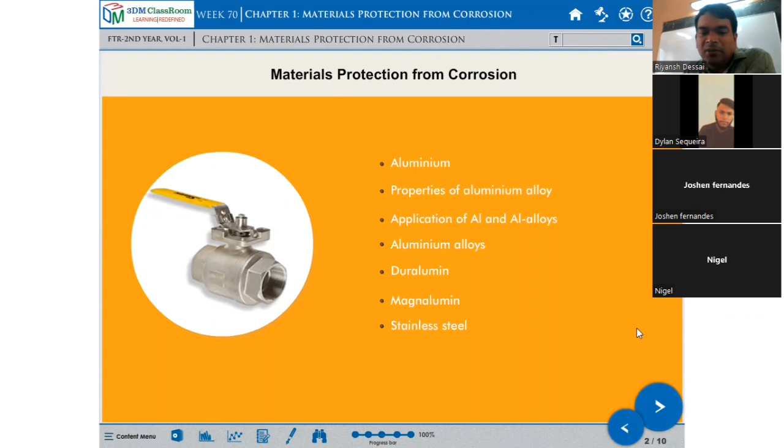Now, aluminum is a product mostly used for metal surface coating purposes. Aluminum powder, zinc powder, stainless steel powder - we can coat it. Aluminum is one of the most abundant elements in the earth's crust and also the most important of the non-ferrous metals. Aluminum is silvery white in color.

It is a light metal with a density of one-third of steel. So the density of this metal is very less compared to mild steel and others. It is one-third.

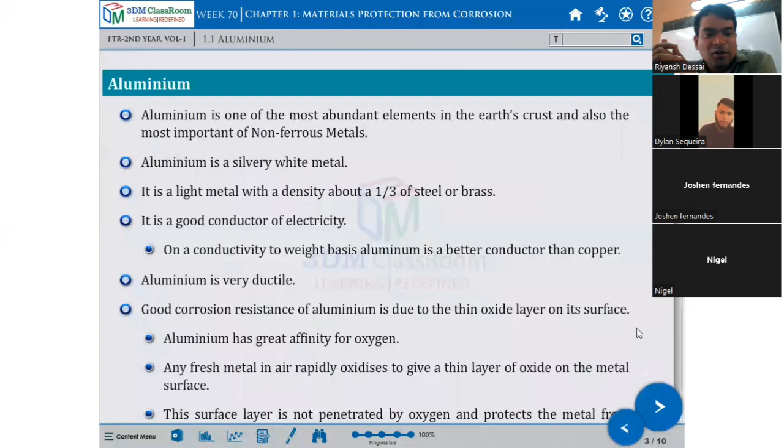It is a good conductor of electricity, that we know. On conductivity to weight basis, aluminum is a better conductor than copper. Aluminum is very ductile - even copper is also ductile, that's why we can draw it into wire. So on conductivity to weight basis, aluminum is better conductor than copper.

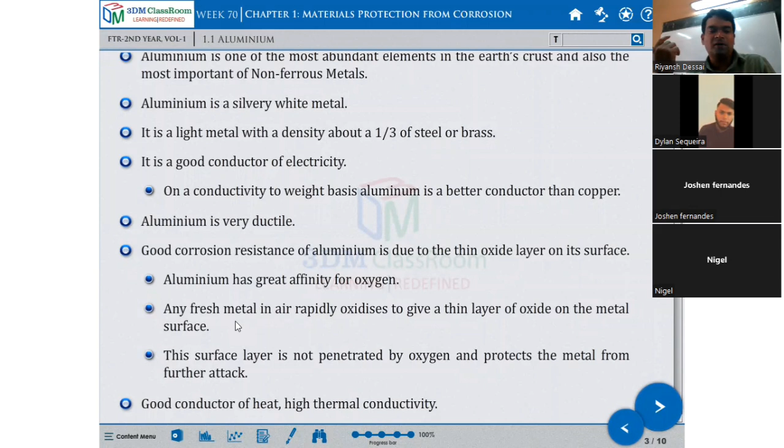Aluminum is very ductile. The good corrosion resistance of aluminum is due to the thin oxide layer on its surface. Aluminum has great affinity for oxygen. Any fresh metal in the air rapidly oxidizes to give a thin layer of oxide on the metal. If fresh metal gets contact with open air, there are chances of oxidizing - another layer will form, like a powder coating. So this surface layer is not penetrated by oxygen and protects the metal from further attack. This layer acts like a shield and protects from further attack.

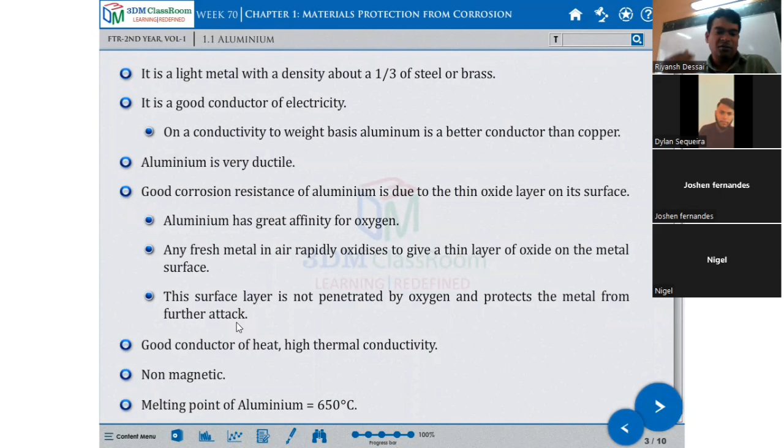Good conductor of heat, high thermal conductivity, non-magnetic, and melting point of aluminum is 650 degrees centigrade. This everybody has to remember. Aluminum is a light metal with good conductivity - it gets melted at 650 degrees centigrade. It has high thermal conductivity, and one more property is that it is non-magnetic.

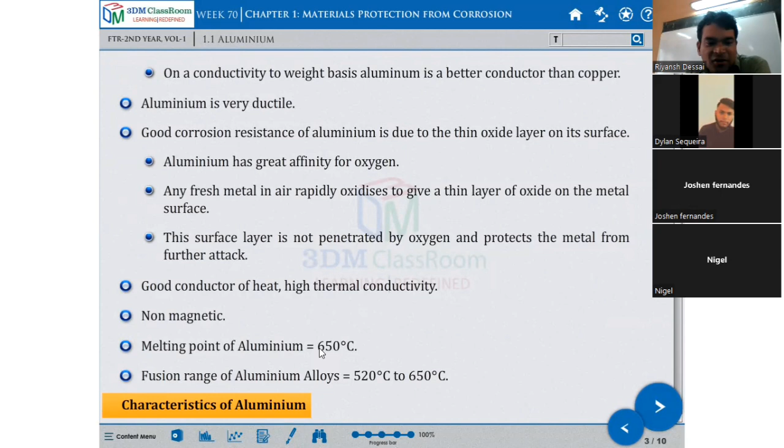When you are checking aluminum, you should check with a magnet. Suppose aluminum gets attracted to the magnet, then it's a mixture of iron, a mixture. If it does not get attracted, that means it's pure aluminum. You can check it that way - non-magnetic and melting point 650 degrees. The fusion range of aluminum alloy is 520 degrees centigrade to 650 degrees centigrade.

Characteristics of good aluminum: light in weight, one-third of the weight of steel, high thermal and electric conductivity, non-toxicity. This is also important - because of this non-toxicity, we can use it for utensils in the kitchen. We can eat off aluminum things. We can also cook in aluminum metal. Then, soft and ductile, low specific gravity, high strength to weight ratio, high reflectivity, and they exhibit toughness and high strength.

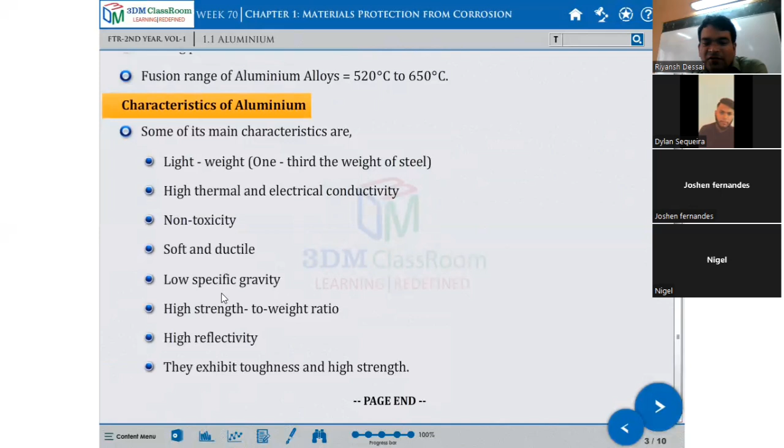Now these are all the properties of aluminum. Now, there are properties of aluminum alloy. Aluminum alloy is a mixture of aluminum with some other metal, maybe magnesium or any other. So aluminum forms high strength alloys in conjunction with other metals such as copper, chromium, nickel, iron, zinc, manganese, silicon - these are the elements we can use to mix with aluminum and form the alloy. Aluminum mixed with copper gives another alloy, chromium mix gives some other property, and you can mix with nickel, iron, zinc, manganese, silicon.

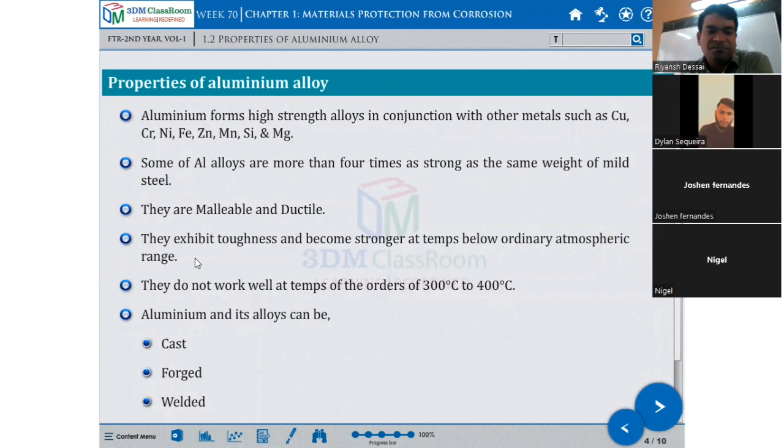Some aluminum alloys are more than four times stronger than the same weight of mild steel. As mixed with other metals, it becomes four times stronger than the same weight of mild. They are malleable and ductile. They exhibit toughness, become stronger at temperatures below ordinary atmospheric range, but they do not work well at temperatures of the order of 300 to 400 degrees.

Aluminum and its alloy can be cast, forged, welded, extruded, and rolled, etc. Cast means you can melt the aluminum and put it into a form, and inside casting you get a desired shape and size - this is aluminum casting. Forge means you can change the shape and size by heating - you heat it. Then welded - aluminum can be welded.

Aluminum welding is very costly, and you will not find skilled labor easily. It requires very high skill, but if you know how to weld aluminum, you will get success. There is a lot of demand for this aluminum welding. Then extruded, rolled, etc.

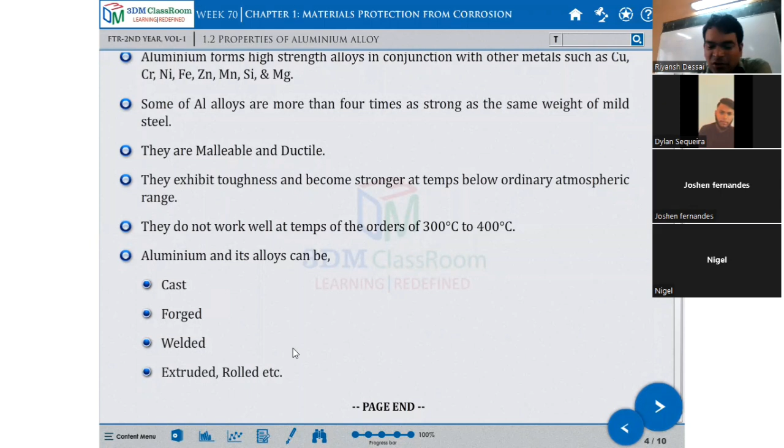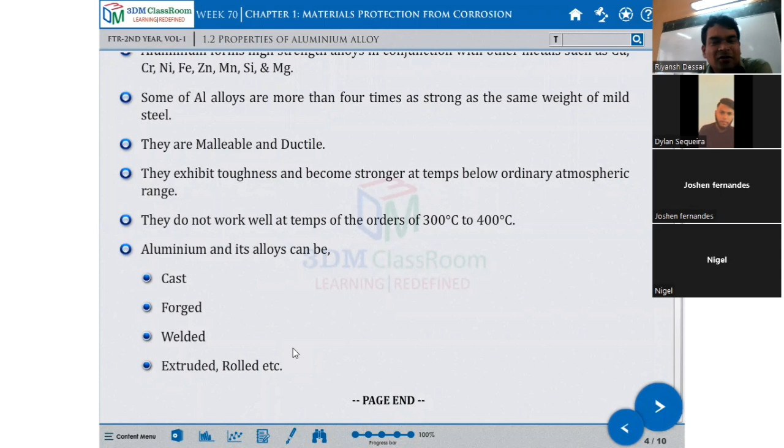Someone can start their business also - you can learn how to weld aluminum and put up a small workshop. There will be high demand for it. I don't know, maybe check some photo or I don't know. Someone who is doing this, but very rarely are people doing it.

Next, the application of aluminum and aluminum alloys: structure framework, engine parts, trim and decorative features, hardware, doors, window frames, tanks, furnishing fittings. This is already covered.

In the food industry, aluminum alloys find applications - both applications are shown in the video. Just watch this video.

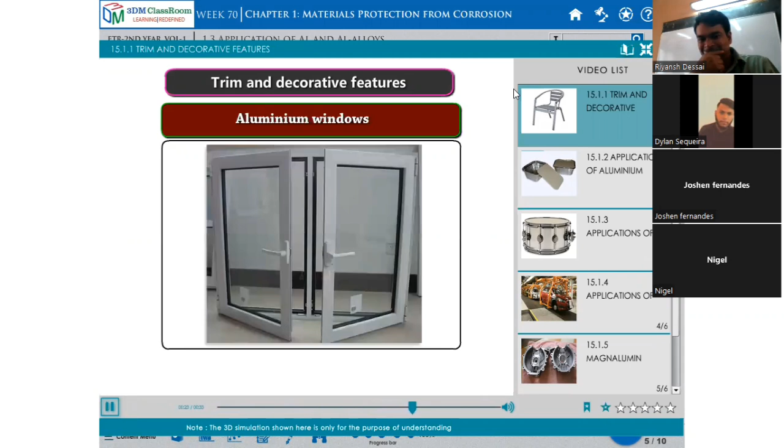Aluminum doors, aluminum fitting, aluminum tanks, aluminum chair, aluminum windows. Many component parts are made up of aluminum alloys. These are the uses of aluminum alloys.

In the food industry too, aluminum has uses. You can see applications of aluminum alloys. In this video, we will discuss the application of aluminum alloys. Shipping containers are also made of aluminum alloys.

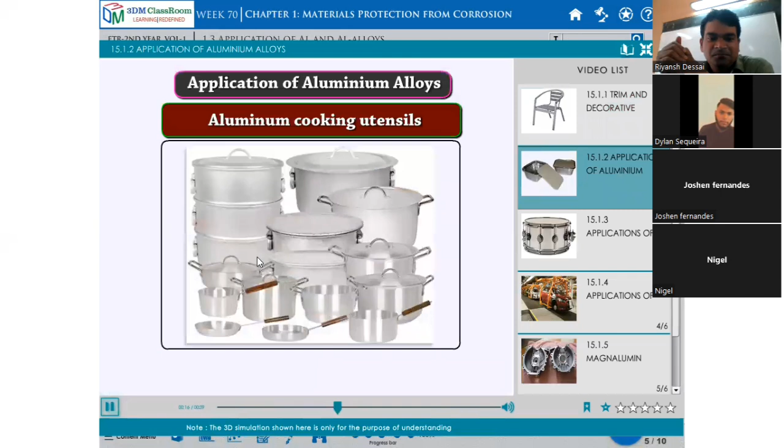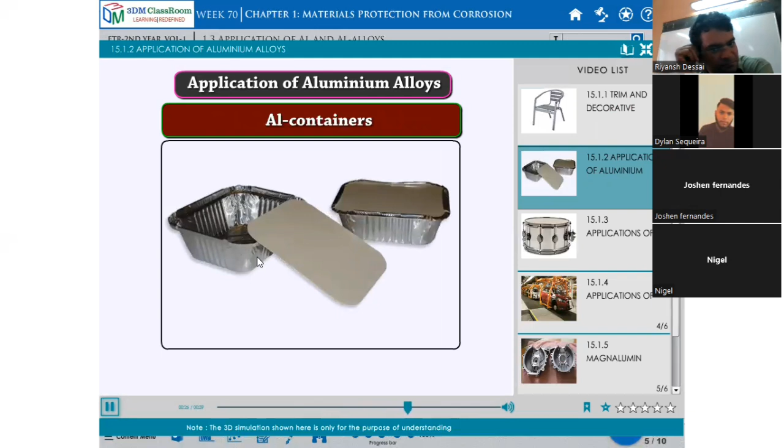Aluminum cooking utensils, aluminum containers, and other containers are also made of aluminum. Aluminum foil and other alloy parts are also used in the food industry. So it is applicable in the food industry.

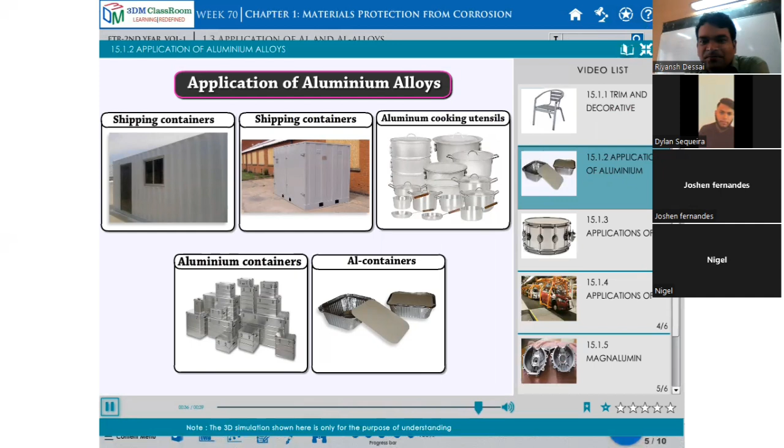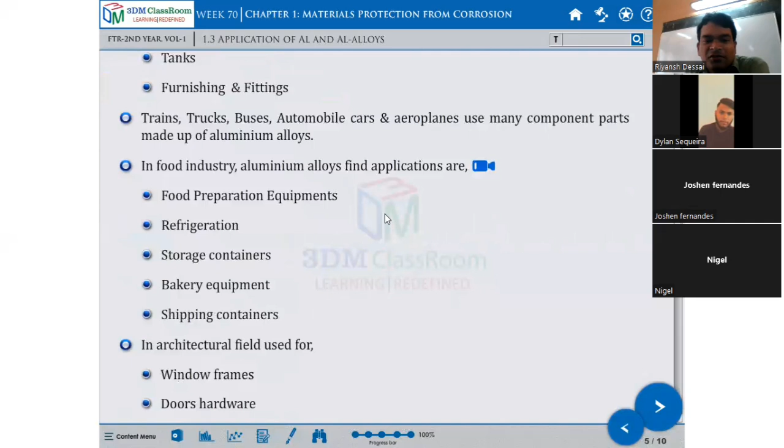Trains, trucks, buses, automobiles, cars, and aeroplanes use many component parts made of aluminum alloy. In the food industry, aluminum alloys find application in food preparation equipment, refrigeration, storage containers, and shipping containers.

In the architecture field, aluminum is used for window frames, doors, hardware, roofings, railing, fasteners, lighting fixtures, solar shading, and grills, etc.

In the process industry, it is used to handle organic chemicals, petrochemicals, and drugs. It is used to produce tanks, drums, pipes, heat exchangers, grating, smokestacks, precipitators, centrifuges, valves, fittings, etc.

So there are various products we can produce using aluminum. In this video, we will discuss the applications of aluminum products.

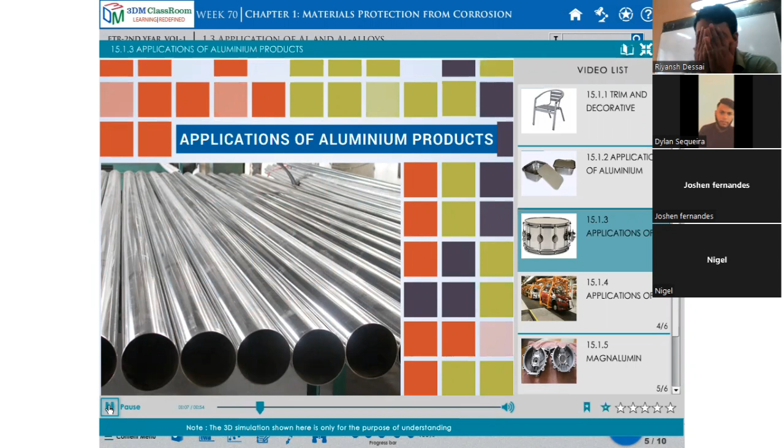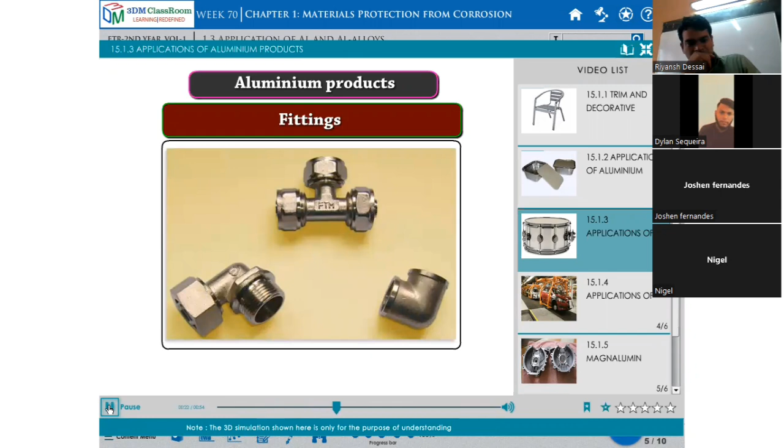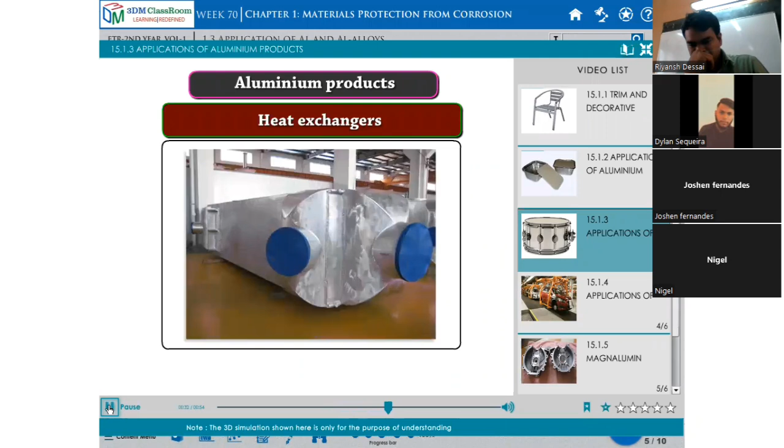Pipes, valves, drums, fittings, gratings, tanks, heat exchangers, smokestacks. These chimneys and such are made of aluminum. Aluminum products are used to produce many different products.

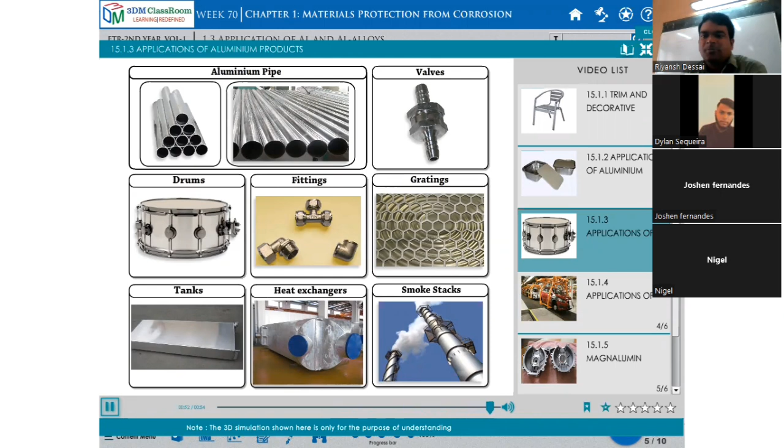Understood? What are the various uses of the aluminum industry? This alloy I will not take up now. Duralumin, I think we already discussed - duralumin is another alloy from aluminum.

It is light, tough, highly ductile, and easily castable. It is a good conductor of heat and electricity, with corrosion resistance. It approaches steel in strength, while its density is one-third that of steel. So its strength is almost equal to steel, but its density is one-third.

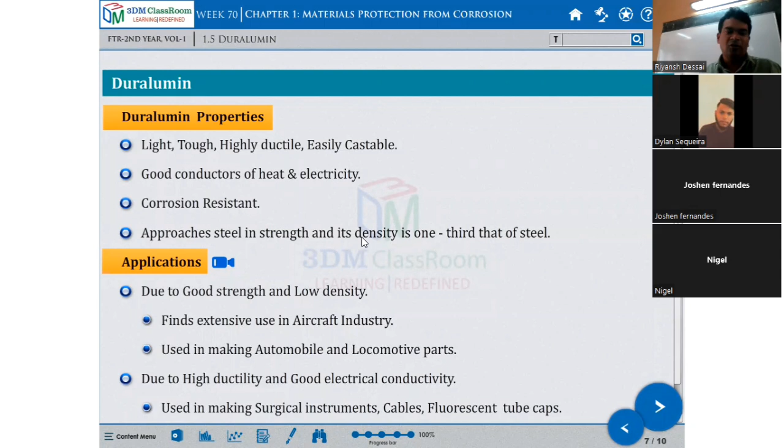Now, where is duralumin mostly used? Due to its good strength and low density, it finds extensive use in the aircraft industry - most aircraft industries use duralumin. It is also used in making automobile and locomotive parts, where the body of automobiles is made of aluminum, which is very important.

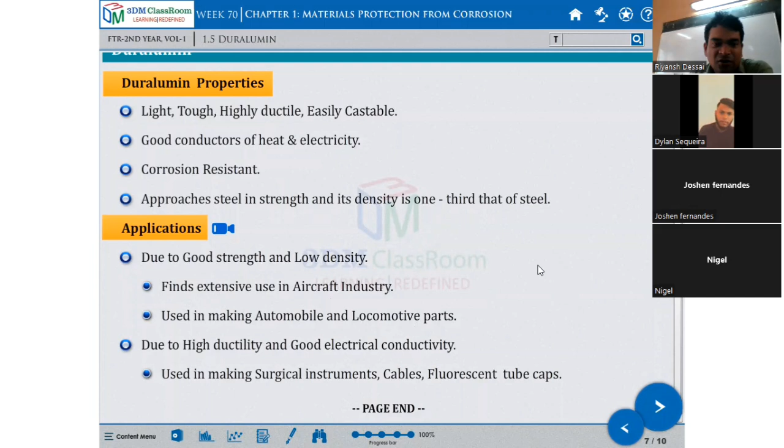Due to high ductility and good electrical conductivity, it is used in making surgical instruments, cables, fluorescent tube caps, etc. So all these - surgical instruments, cables, fluorescent tube caps - can be made using duralumin metal.

Magnalumin is another aluminum alloy. It is strong, tough, and lighter than aluminum. It possesses mechanical properties similar to brass. It is used for making cheap balances, airplane parts, and scientific instruments.

So this is used for limited purposes - making cheap balances, airplane parts, scientific instruments. Electron application is used for the crankcase of engines, cover brackets, and similar lightly stressed components, and in construction of pans, petrol and oil tanks, brake components, and gearboxes.

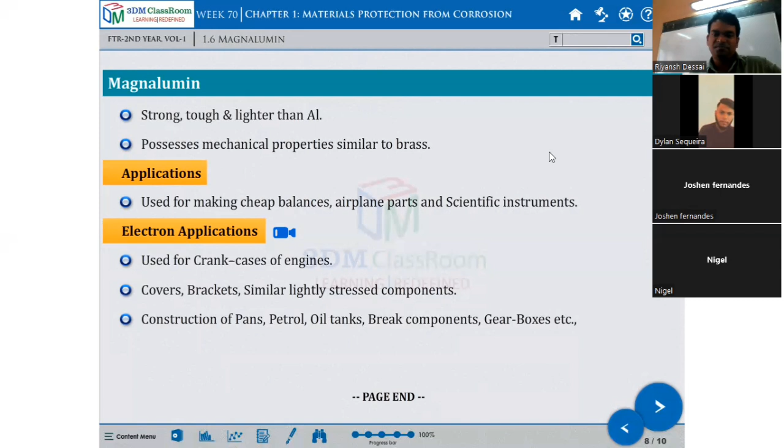Let's look at the electron application. Magnalumin electron applications - in this video we will discuss the Magnalumin electron applications: gearboxes, brake components, crankcase of engine, oil tanks. These are the products we can manufacture using Magnalumin.

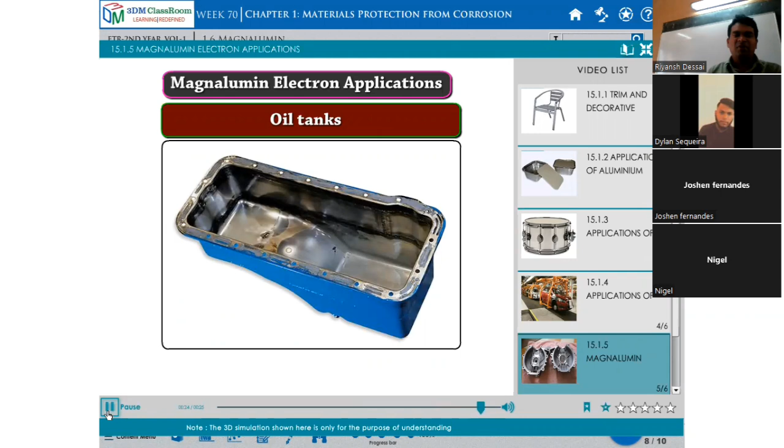Now next, what is the metal? Stainless steel - adding chromium to low carbon steel gives it abrasion and corrosion resistance. So if we mix low carbon steel with chromium, it gives abrasion and corrosion resistance.

In addition to iron, carbon, nickel, and chromium, modern stainless steel may also contain other elements such as niobium, molybdenum, and titanium. If you mix all these - iron, carbon, nickel, chromium - modern stainless steel may also contain elements such as niobium, molybdenum, and titanium.

Nickel, molybdenum, niobium, and chromium enhance the corrosion resistance of stainless steel. The addition of a minimum of 12% chromium to the steel makes it resist rust, making it more stainless than other types of steel.

Chromium, as a steel component, combines with oxygen in the atmosphere to form a thin, invisible layer of chrome-containing oxide called a passive film.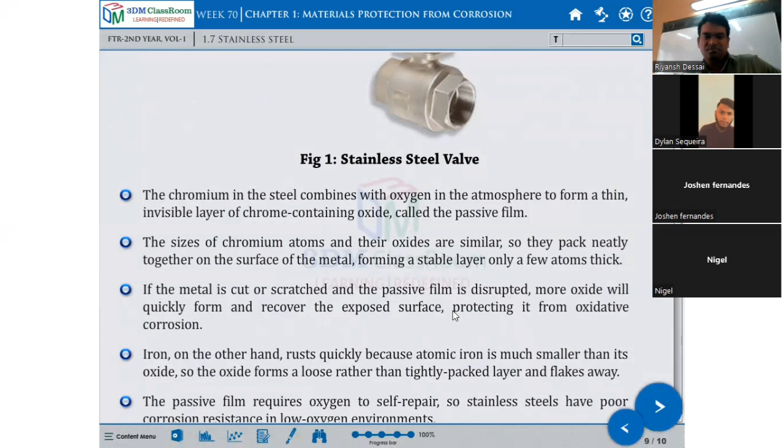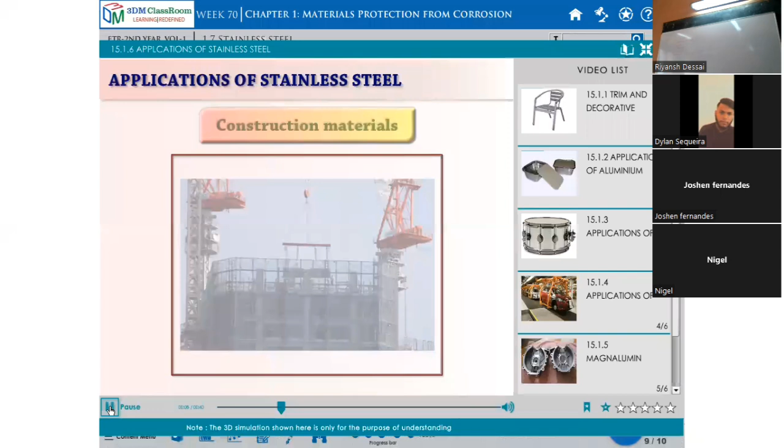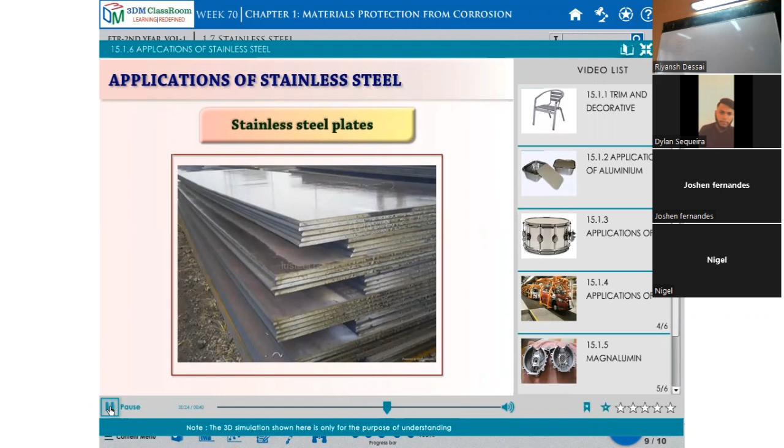Application of stainless steel - where stainless steels are used. In this video, we will discuss the applications of stainless steel: construction materials, cookware, stainless steel cutlery, stainless steel plates, stainless steel coils, stainless steel wires. There are over 150 grades of stainless steel, of which 15 are most commonly used.

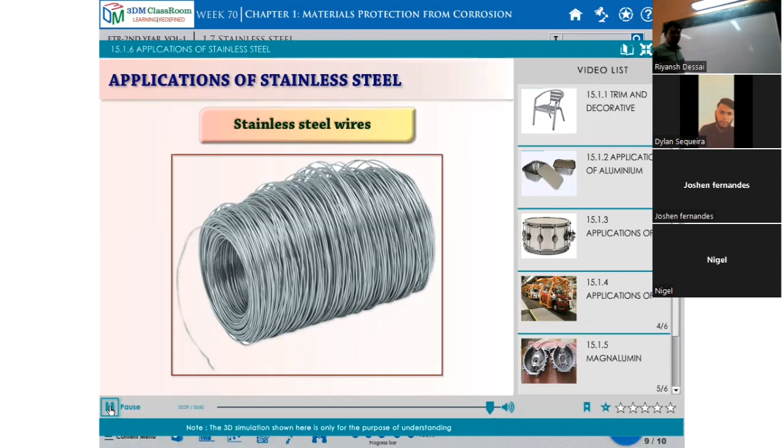Stainless steel wires are also available.

Now, what are different grades of stainless steel? This is product knowledge you must have - aluminum, stainless steel, copper, brass, and other metals used in industry as well as day-to-day life. You should know which type of grade is used where. Cast iron, mild steel, MS, copper, aluminum, brass, and stainless steel - these are the very common metals used in everyday life.

So where are we using stainless steel? Utensils, and nowadays people are more concentrated on the kitchen - kitchen cabinets and cabinet kitchen trolleys have open baskets made of stainless steel. They have certain grades, 304 grade, 301 grade. If good grade material is used, it will survive more life. You should know the basic idea of that.

You might ask, after using some time, 304 grade will start getting rusted. So don't worry - after that you should know what the grade should be, but which is the perfect grade, how we can mention it, how we can check it.

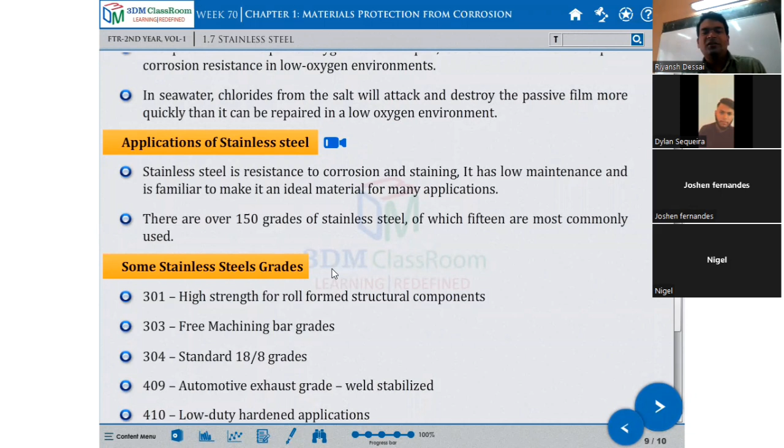There are over 150 grades of stainless steel. Can you imagine, 150? Even my own flat has the same situation - it uses 304 grade and it started rusting. That's why we have to go for standard traders, branded ones. There are 150 grades of stainless steel, of which 15 are most common.

Then here they have not mentioned 316 - there is another grade. Stainless steel 316, which is very costly but lifelong. That they have not mentioned. 409 is there, 410 - these are all low grade.

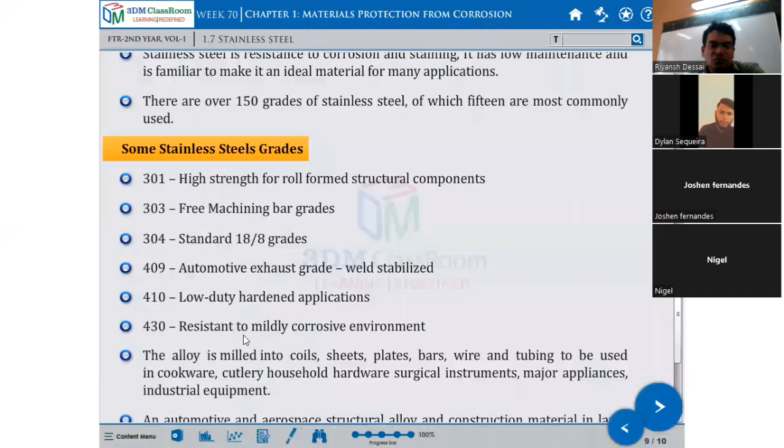409 - automotive exhaust grade, weld stabilized. 410 - low duty hardened application. And 430 - resistance to mildly corrosive environment, only mild. But these are low grade, very low grade. These are the standard ones - 316 is not mentioned, which is the highest grade after 304, no?

316 - the alloy is milled into coils, sheets, plates, bar, wire, and tubing to be used in cookware, cutlery, households, hardware, surgical instruments, and major appliances industry. So nowadays stainless steel is majorly used in surgical instruments - surgery tools are all made of stainless steel, not ordinary grade, very high grade.

It remains inside your body also - the plate they use is made of very good stainless steel, so it will not get rusted. Lifetime plate, lifetime. That's why the cost of that metal is very high.

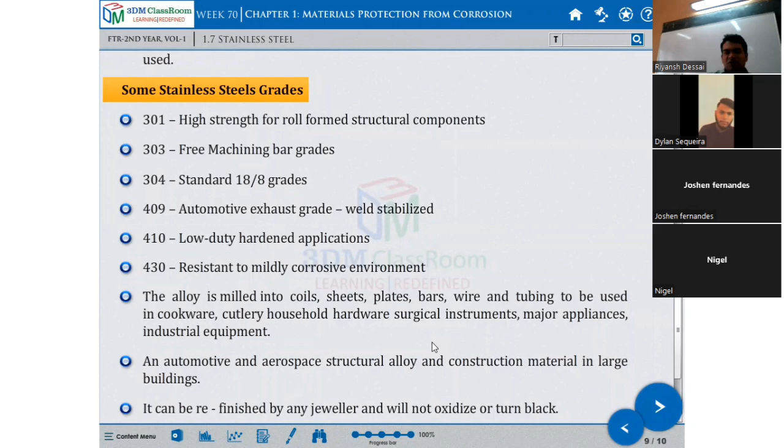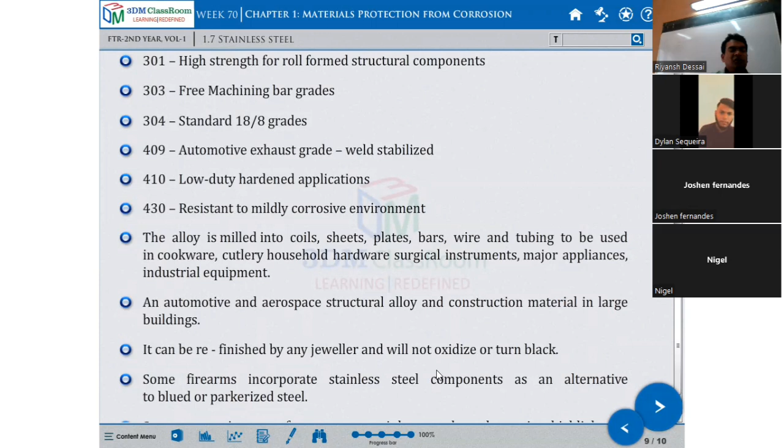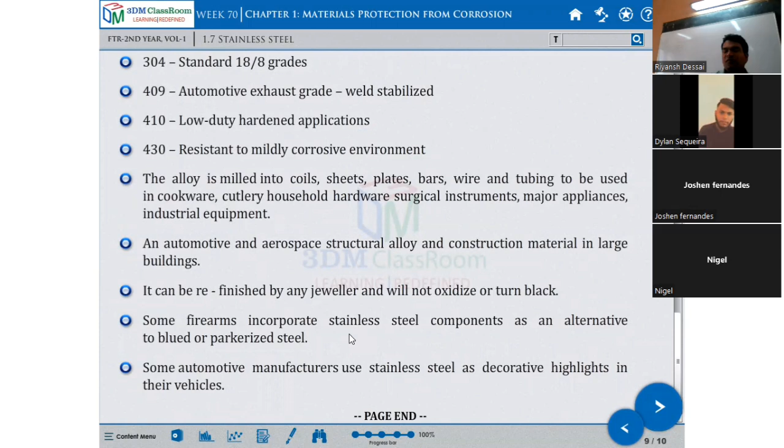The major applications are industrial equipment, automotive and aerospace structures, alloy and construction material in large buildings. It can be refinished by any jeweler and will not oxidize. Some firearms incorporate stainless steel components as an alternative to blued or parkerized steel. Some automotive manufacturers use stainless steel as decorative highlights in their vehicles - today you see the shining stainless steel light rods like that.

Something decorative - even if you go into your house, they are putting stainless steel railings for the look. There are actually some chrome plated and some stainless steel, but for looks, some are decorative items also.

If you enter a pharmaceutical company, you will find everything stainless steel - everything, because they cannot use MS and all, it has to be food grade. All your drugs, tablet powder, they handle with stainless steel. It has to be food grade.

For any industry manufacturing unit, they require main utilities like water, steam, air conditioning, chilled water - so they can supply by pipelines. But compressors nowadays are very common, permanent compressors. In the utility there will be a compressor that starts giving so many cubic feet, 150, 200 cubic feet, and that starts delivering to the plant.